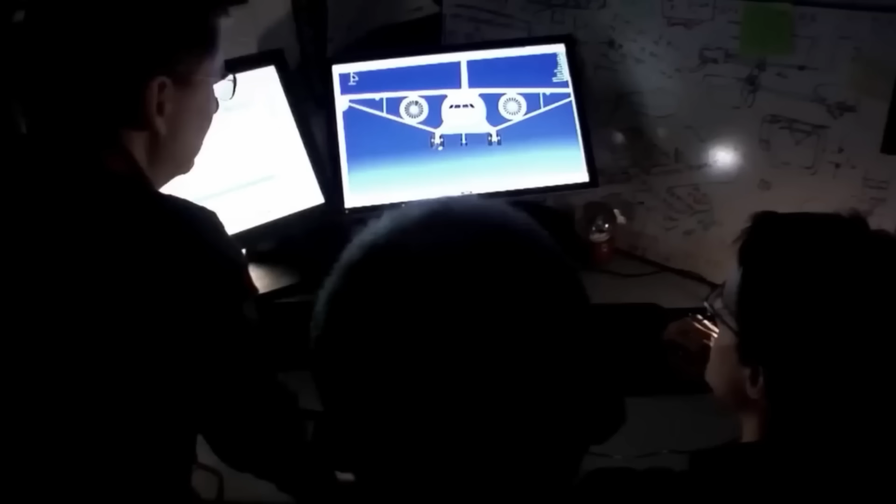For years, Boeing has studied an aircraft that refuses to fit into any existing category. It's too large to behave like a narrow body, yet too efficient to resemble a traditional wide body. Informally called the Boeing 797, it remains unlaunched but far from forgotten.

For decades, airline networks were built around the simple assumption that demand and aircraft would grow together. But that logic has begun to fracture. Many long-haul routes no longer justify the capacity of wide bodies, while narrow bodies stretched to their limits are increasingly being asked to fly missions they were never originally designed for.

The retirement of the Boeing 757 widened this gap and removed an aircraft that was capable of carrying passengers across oceans without the weight of larger jets.

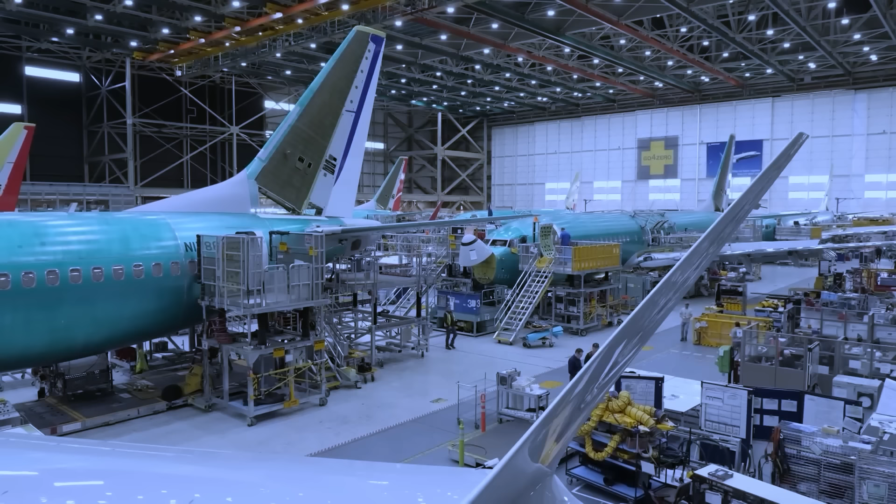At the same time, airlines have shifted toward point-to-point connectivity rather than relying solely on massive hub flow. This has created demand for aircraft that can profitably link secondary cities across continents. Manufacturers have responded by extending narrow-body range, yet these aircraft still face payload constraints and passenger comfort trade-offs on longer sectors compared to wide bodies.

What the industry lacks is an airplane engineered specifically for this middle space, not adapted into it. And that unresolved space is precisely where the 797 begins to make sense.

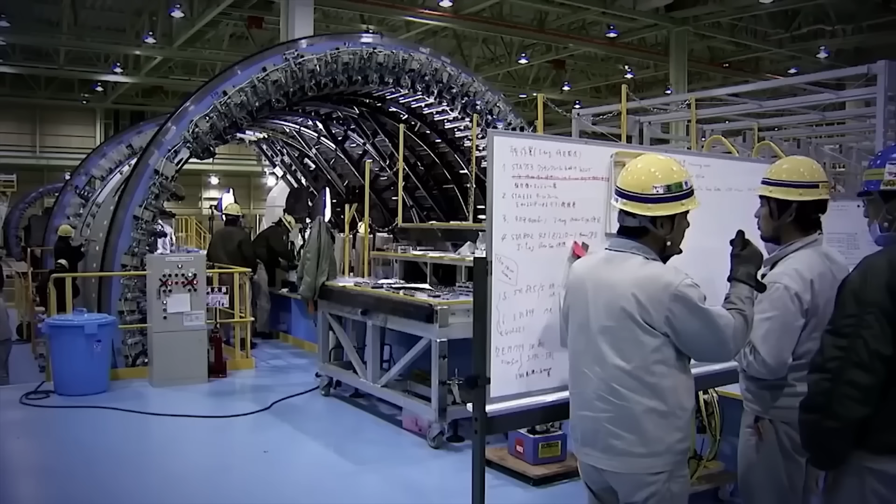In 2015, Boeing was ready to launch a new design. By 2017, multiple airlines had expressed interest. Boeing expected this new midsize airplane to generate 30% more revenue than narrow bodies and have 40% lower trip costs than wide bodies it'd replace.

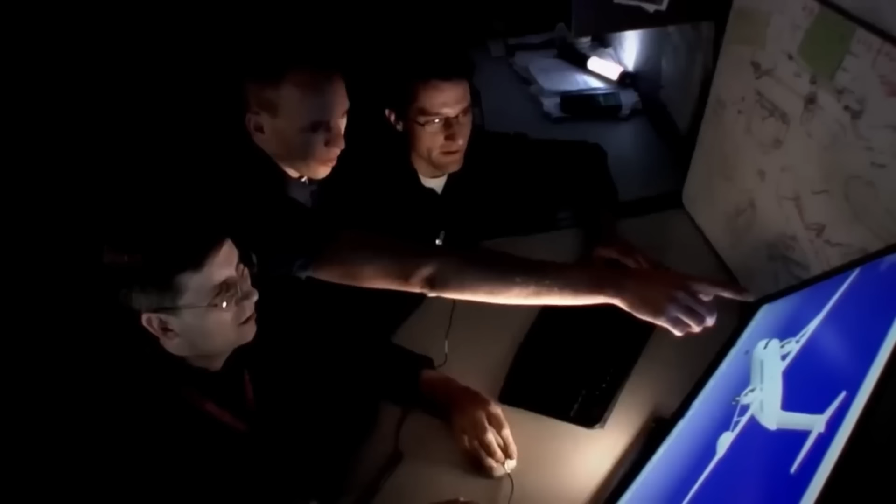In 2020, the plan was paused, then revived in 2021. By 2022, Boeing announced the program would be delayed again until new engines and development tools were ready.

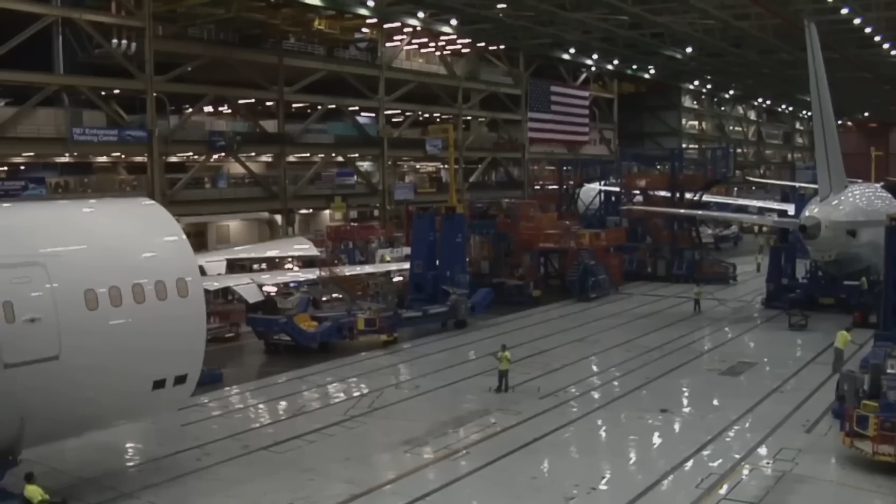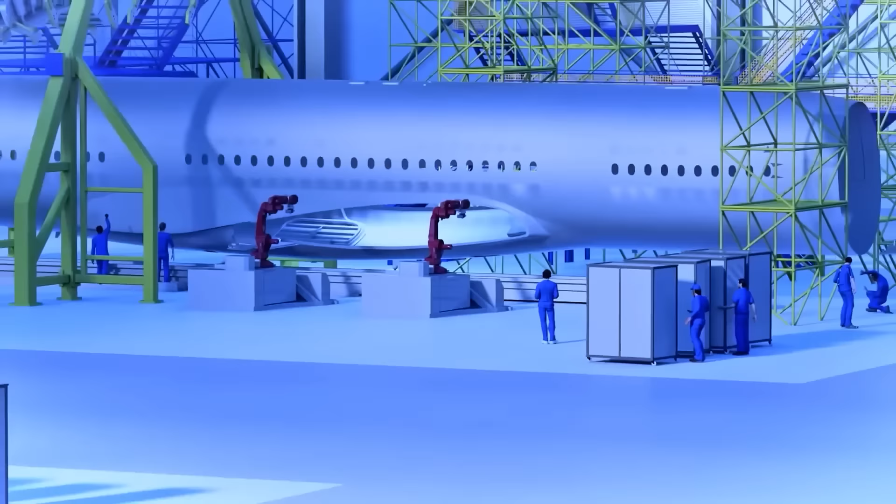However, if the program moves forward, the Boeing 797 would almost certainly be designed mostly inside a digital engineering environment long before any physical structure is produced. This reflects a broader industry shift toward model-based development, in which an aircraft is validated virtually before manufacturing risk is introduced. Engineers can now simulate structural loads, fatigue behavior, thermal expansion, aerodynamic forces, and even maintenance accessibility with a level of precision that wasn't possible in earlier generations of aircraft design.

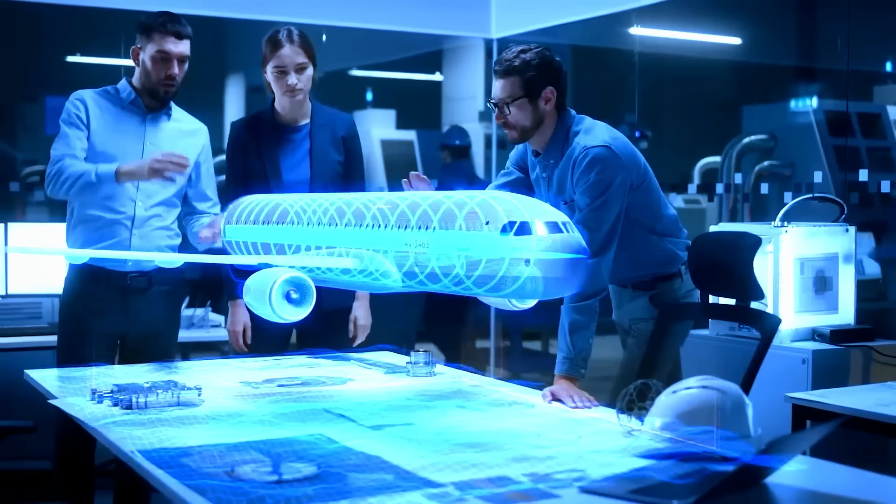The motivation behind this approach is as economic as it is technical. Errors identified during digital modeling can often be corrected with minimal disruption, whereas problems discovered after tooling is built have historically cascaded into delays measured not in months, but in years.

Commercial aircraft have relied on circular fuselages for decades because the geometry distributes pressurization forces evenly. This minimizes stress concentrations and simplifies structural reinforcement.

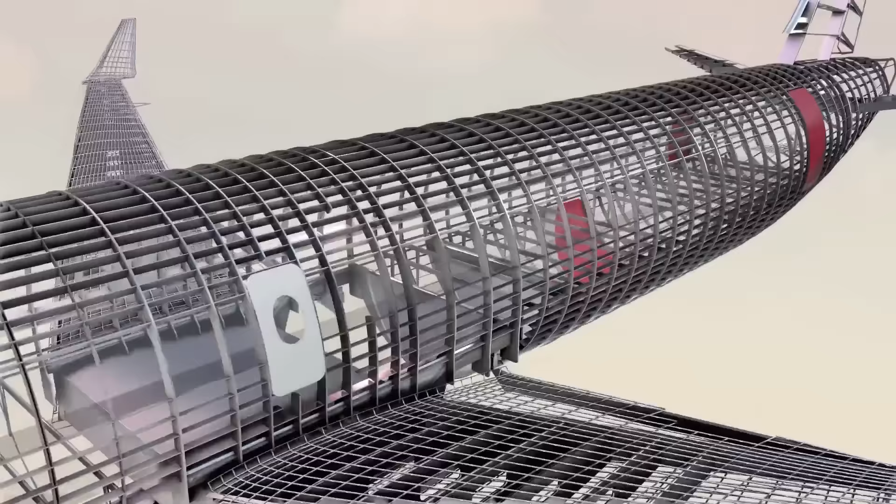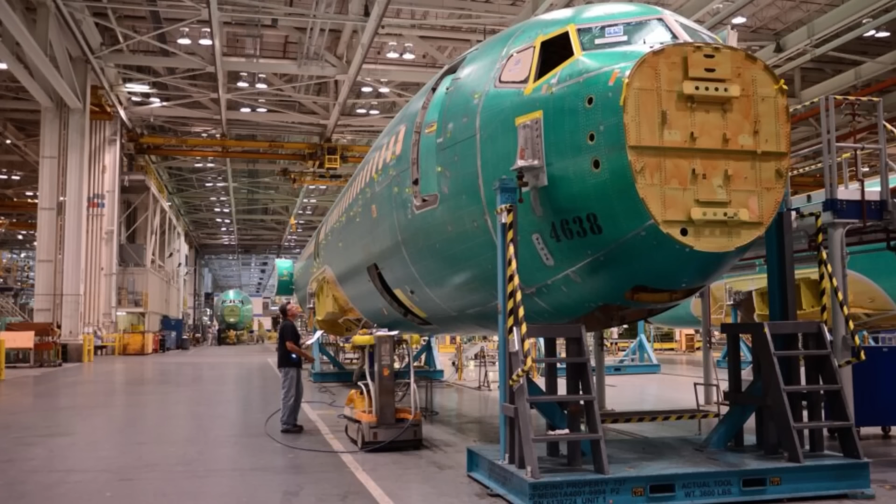However, Boeing has publicly discussed studying a twin-aisle fuselage with a slightly elliptical cross-section for the new midsize airplane. This is intended to provide wide-body style boarding efficiency while avoiding the structural weight penalties typically associated with larger cabin diameters. Once a pressure vessel deviates from a circular shape, load paths become more complex, and localized stresses must be carefully managed through material orientation.

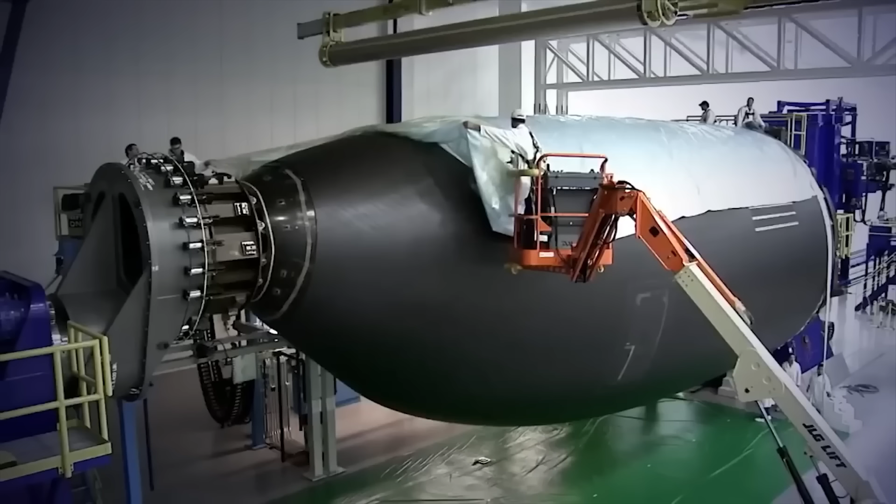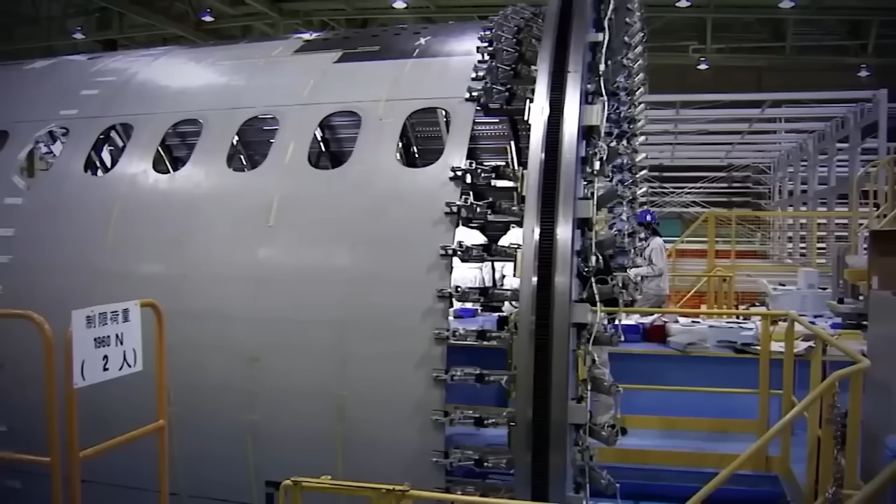This is precisely where a carbon composite fuselage offers advantages that traditional aluminum cannot easily replicate, since carbon fibers can be aligned along anticipated stress directions. This allows engineers to tailor stiffness and strength exactly where they are required.

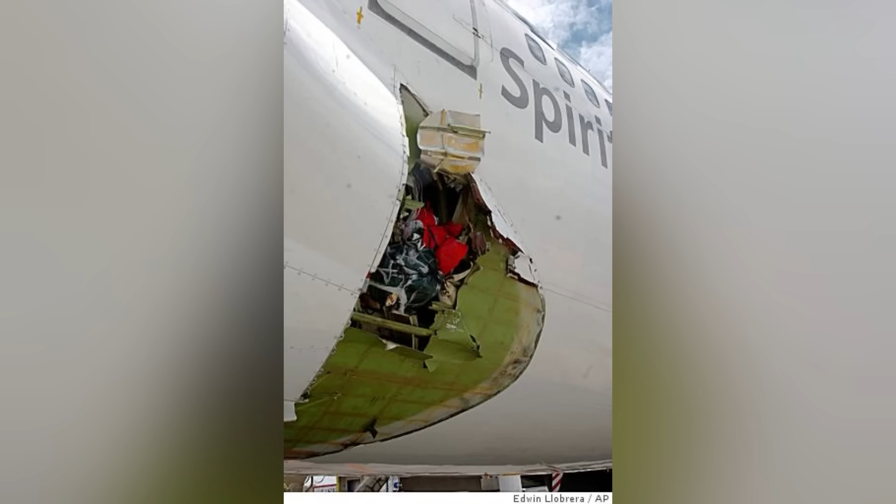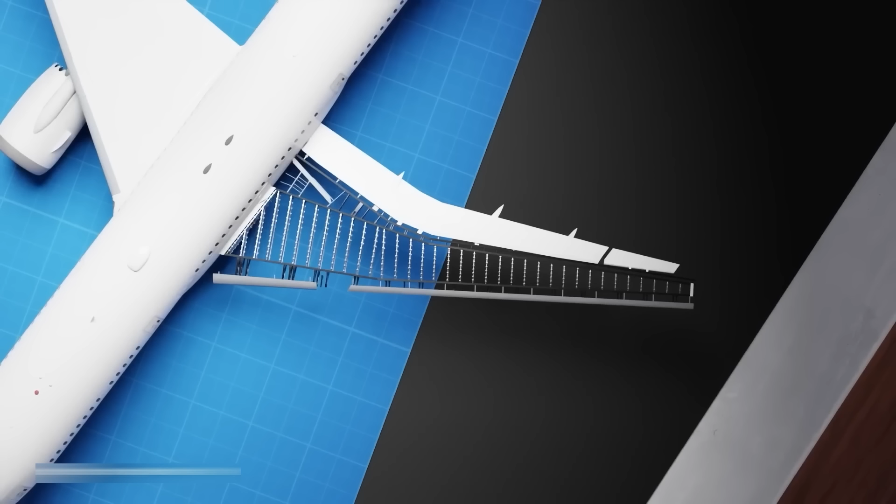Large composite sections also reduce the number of mechanical fasteners compared to metal construction, to reduce fatigue exposure and long-term inspection demands. Yet composites rely heavily on advanced inspection techniques because certain forms of impact damage are not always visible on the surface. But it's the wing that ultimately determines whether the airplane achieves the efficiency required to justify its existence.

Any aircraft attempting to occupy the space between narrow-body and wide-body categories must be designed to deliver aerodynamic efficiency while remaining compatible with airport infrastructure designed around smaller aircraft.

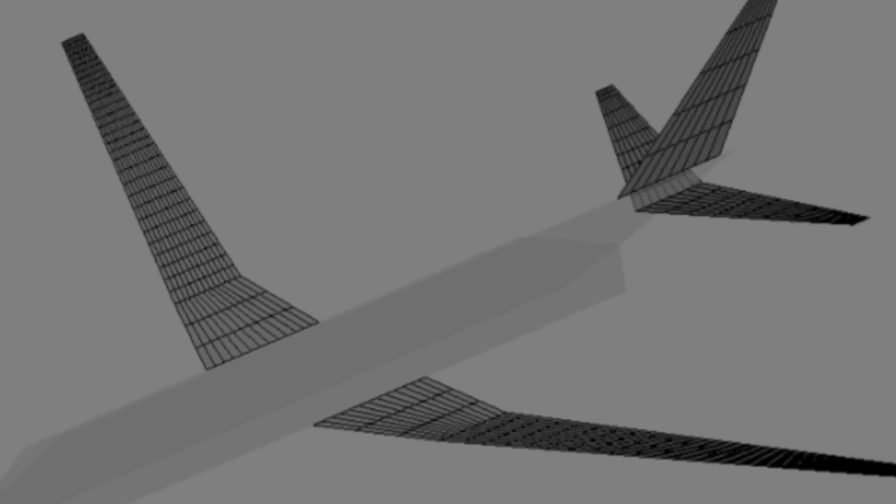Industry analysis widely anticipates a high aspect ratio composite wing. This reflects aerodynamic principles already demonstrated on newer generation aircraft, such as the 787, where longer spans reduce induced drag and improve fuel efficiency. Yet span cannot grow indefinitely because gate compatibility imposes hard operational limits.

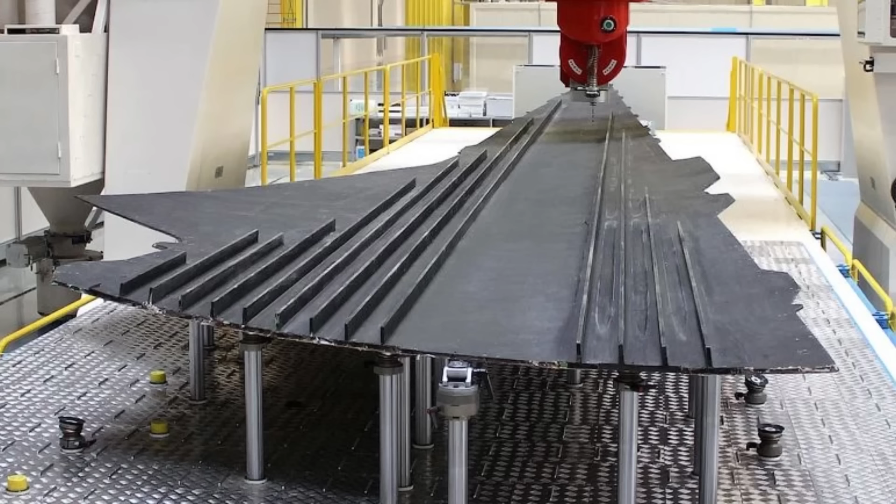This is why folding wingtip concepts have appeared in multiple industry discussions. Composite wings are intentionally designed to flex under load, sometimes by several meters during flight. This way, aerodynamic forces distribute more evenly and reduce stress concentrations at the wing root.

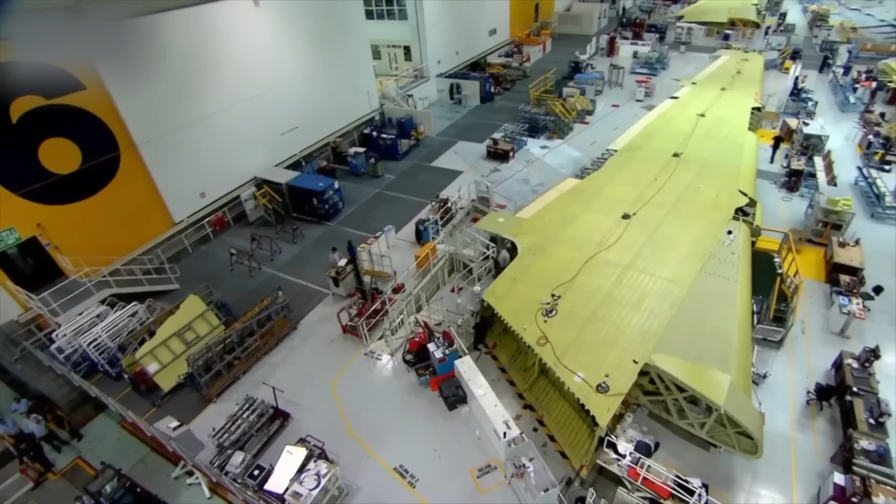At the center of this structure sits the wing box, which is the primary load-bearing element responsible for carrying bending forces that reach extraordinary magnitudes during turbulence. Fuel would be stored directly inside the sealed structure, meaning manufacturing precision is not merely desirable but essential.

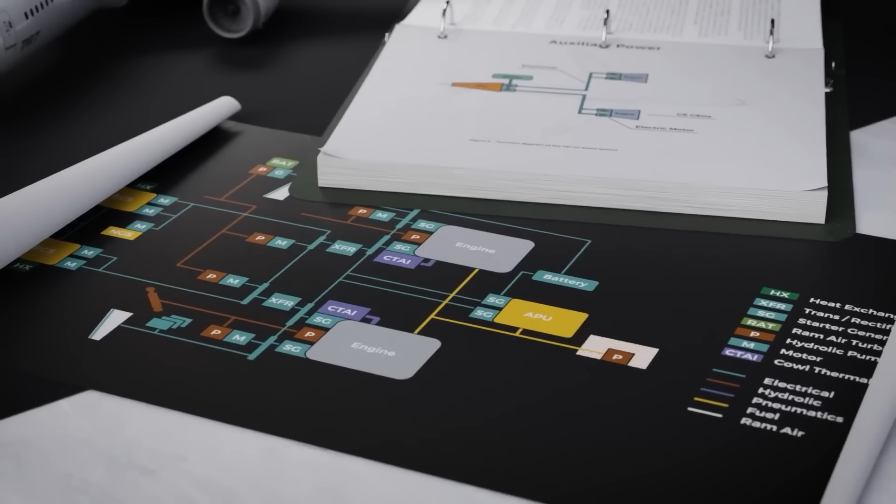Although no official program has begun and Boeing has not selected an engine, manufacturers have spent years studying the thrust class required to make such an aircraft viable. Most industry estimates place the requirement somewhere between 45,000 and 55,000 pounds of thrust. It is envisioned to use next-generation high-bypass engines, likely smaller than 787 engines, to achieve better fuel efficiency than current jets. Boeing has explored options with GE Aerospace, Pratt & Whitney, and Rolls-Royce.

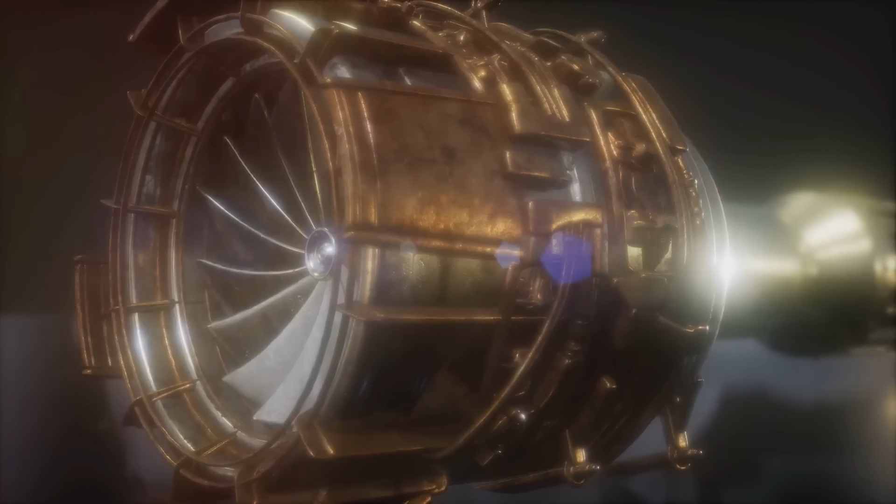The engine is expected to power a middle-of-the-market aircraft, focusing on routes between 4,000 and 5,000 nautical miles. The 797 could even incorporate advanced and highly efficient, or even hybrid electric, propulsion systems if developed in the 2030s.

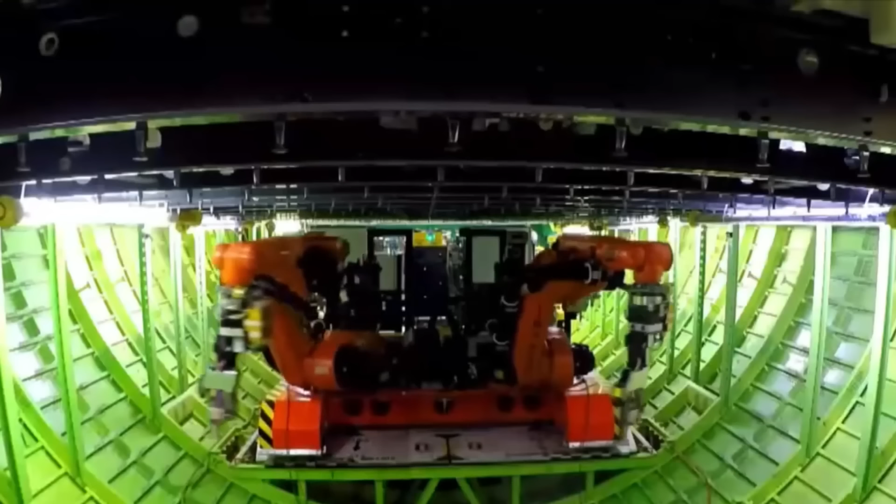The production strategy for any future Boeing clean-sheet aircraft may reflect lessons learned from the 787. The globally distributed supply chain there introduced coordination challenges that took years to stabilize. Industry reporting indicates a stronger preference toward tighter supplier oversight and a more integrated manufacturing architecture, even if major structural components continue to be built across multiple regions.

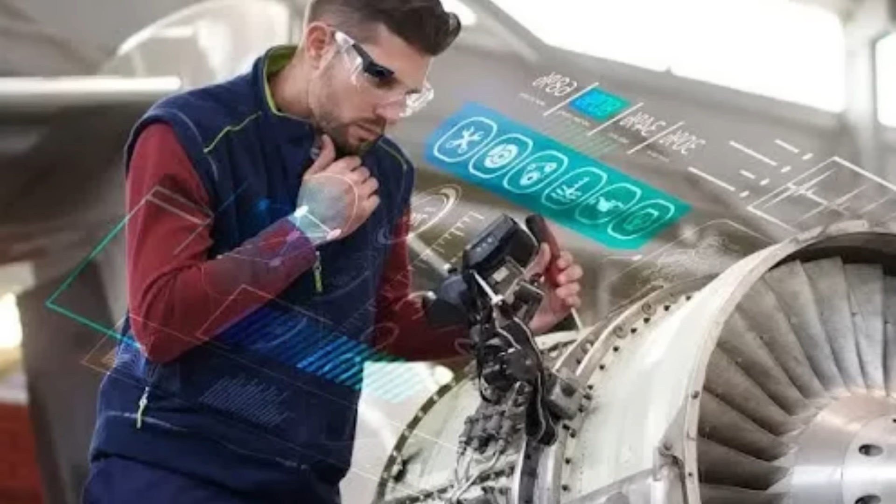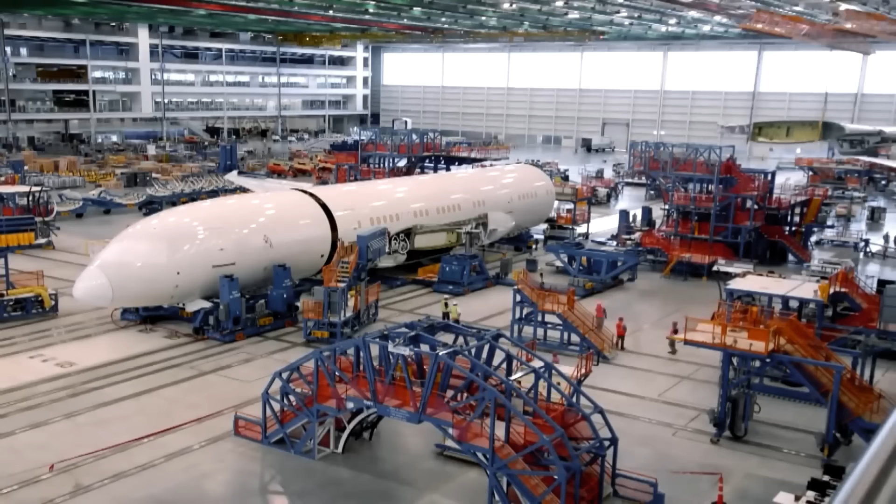Automation is expected to play an expanded role, with robotic drilling improving precision and digital measurement systems verifying tolerances in real time. Augmented reality guidance tools are already being evaluated to assist technicians during complex installations. They could project instructions directly onto the structure rather than relying solely on traditional documentation. The objective now is production predictability, because airlines are purchasing delivery certainty as much as they are purchasing aircraft capability.

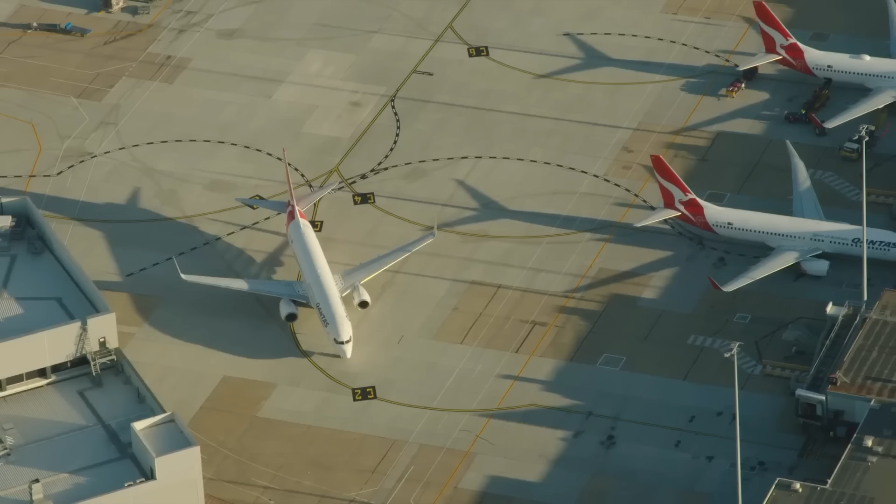However, building the airplane is only part of the challenge. Designing it to survive decades of cyclic stress may be even more critical. Every commercial aircraft operates within cycles of pressurization and depressurization, slightly flexing the fuselage during climb and relaxing again during descent thousands of times across its service life.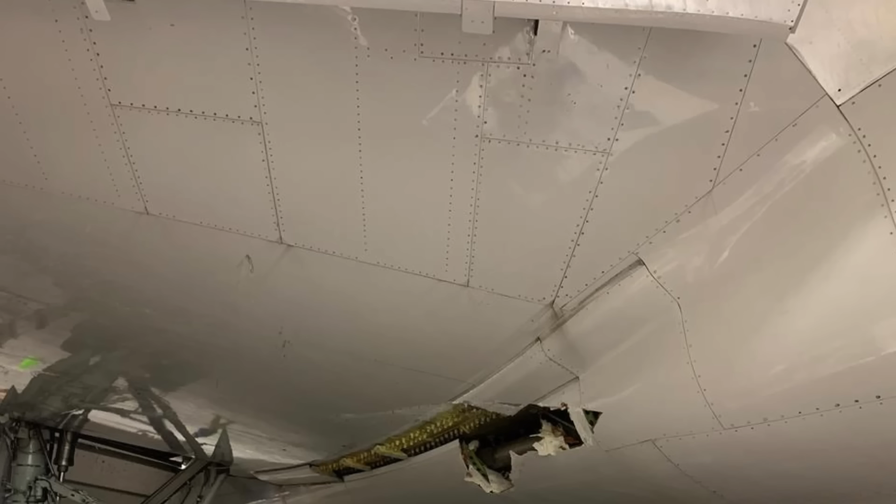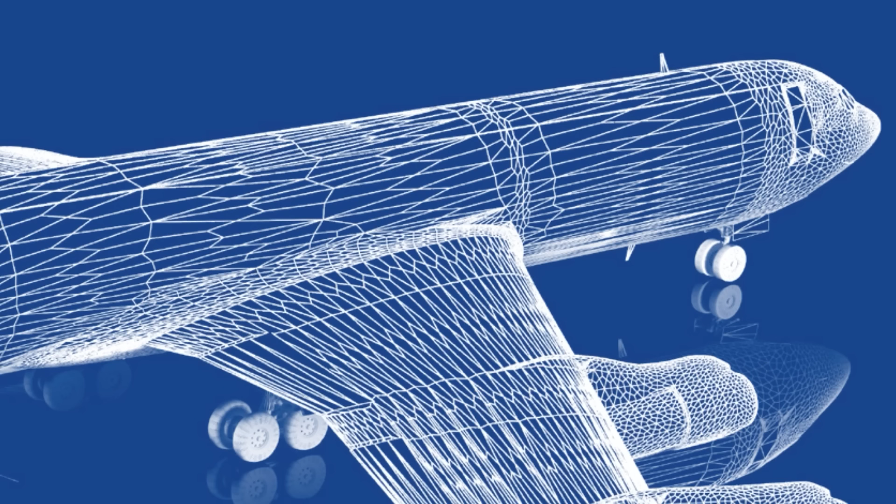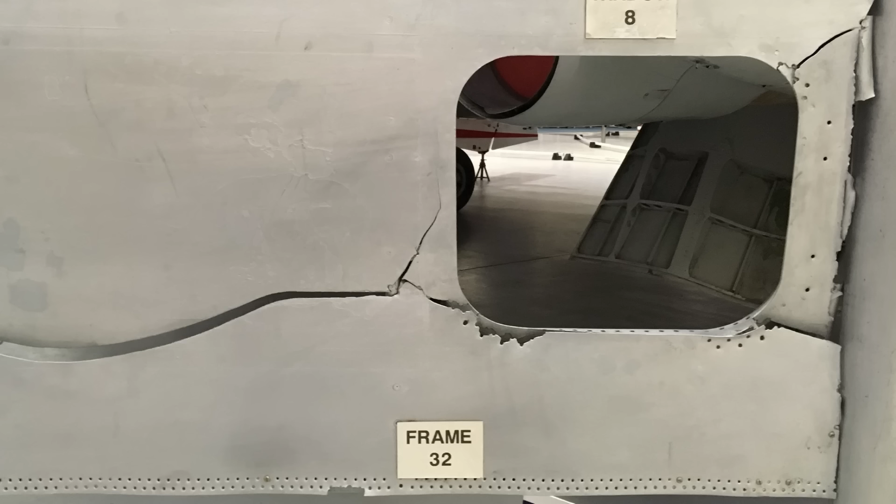Metal airframes eventually accumulate fatigue under these conditions, but composite structures behave differently. They resist crack propagation but require more sophisticated inspection techniques. Newer aerospace designs incorporate structural health monitoring systems like fiber optic sensors, capable of detecting strain variations in real time. This helps teams identify emerging stress concentrations long before they manifest as visible damage.

Aircraft are no longer evaluated during only scheduled inspections. They are progressively becoming machines that report their own structural condition.

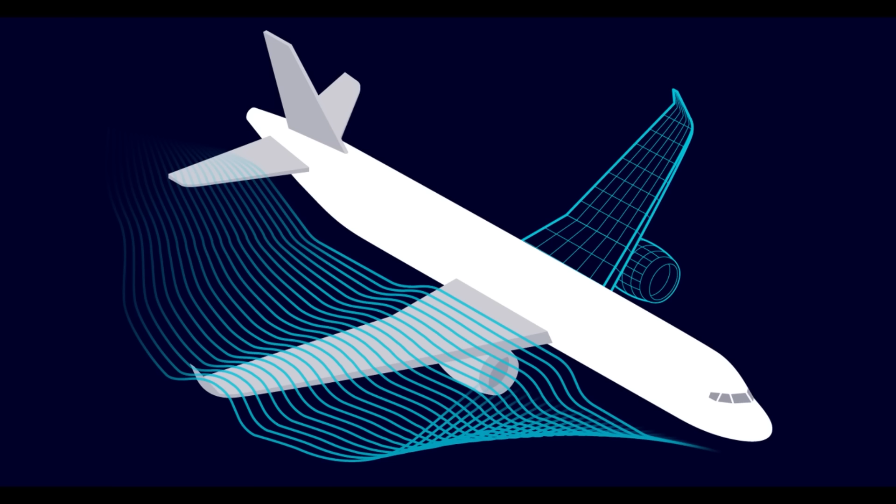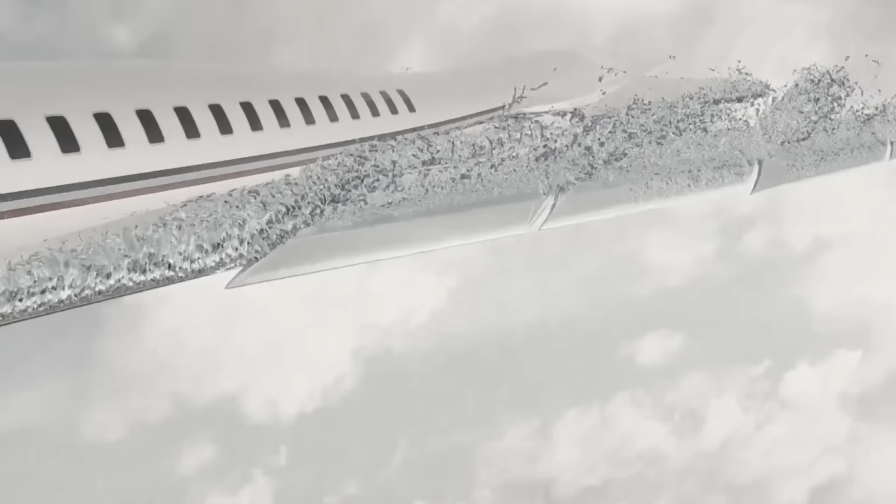At the same time, aerodynamics determines whether the aircraft fulfills its economic mission. While wind tunnel validation remains indispensable, computational fluid dynamics now performs much of the early aerodynamic refinement. This enables engineers to simulate airflow across millions of data points and adjust surfaces with remarkable precision. Minor contour modifications can translate into measurable fuel savings when compounded across decades of operation.

Research into laminar flow continues throughout the industry, although maintaining it consistently in airline service remains technically challenging due to surface contamination. Even engine nacelles and nose shaping are refined through these simulations to minimize drag. Passengers will likely never notice these aerodynamic subtleties, but airlines absolutely will, because efficiency scales with every flight hour.

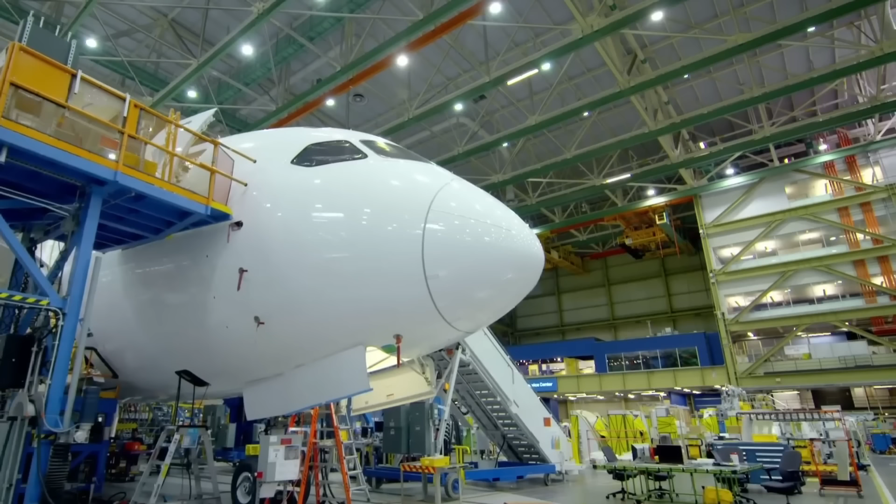Regulatory scrutiny has intensified across the aerospace sector and ensures that any new aircraft must demonstrate compliance across thousands of safety criteria under worst-case conditions, including engine failure during takeoff, rejected departures at maximum weight, crosswind controllability, and emergency evacuation timing. Nothing is assumed, and everything is demonstrated.

Certification alone can consume close to a decade when development and testing are combined. This explains Boeing's repeated emphasis that its next aircraft must be launched only when technological readiness, along with supply chain stability and regulatory pathways, align.

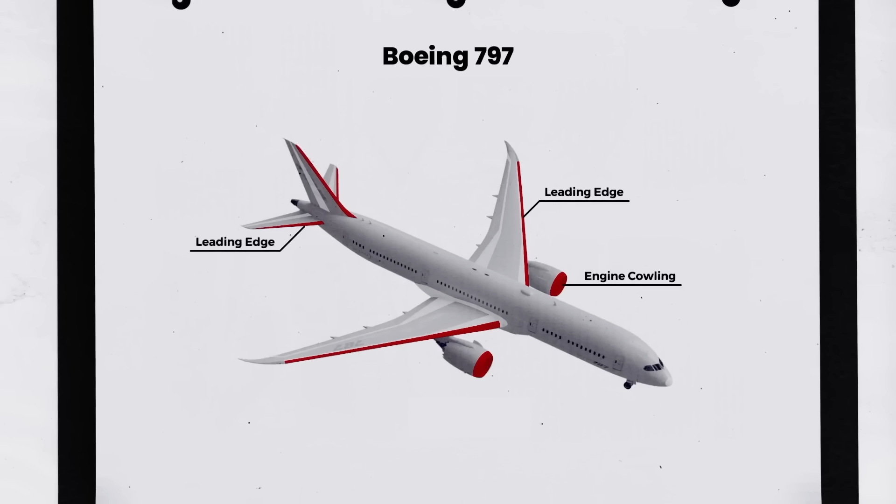Until that moment arrives, the 797 remains what it has long been: a serious engineering study, refined but not yet approved. And history suggests that some of aviation's most influential aircraft begin exactly this way.

About that question from earlier.

Specialized aircraft offer optimized efficiency and payload capability on routes that are beyond the practical limits of single-aisle jets. However, increasingly capable narrowbodies provide lower operating risk, greater scheduling flexibility, and easier airport compatibility, which makes them attractive for airlines prioritizing frequency and cost control over maximum capacity.

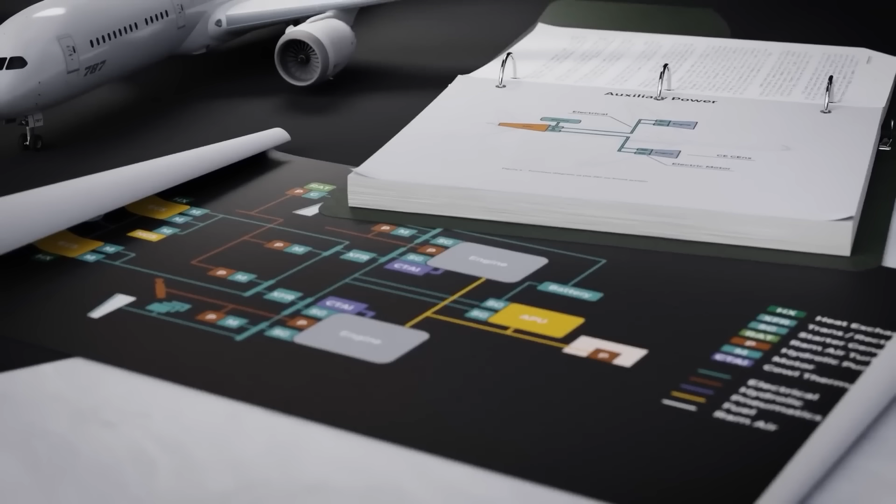The NMA is not a promise yet, but the technologies expected to shape it are already influencing how future aircraft will be engineered, manufactured, and certified. If launched, it would likely mark one of Boeing's most consequential design decisions in decades.

For years, the largest version of Boeing's next widebody family felt like a ghost aircraft. Talked about quietly, studied internally, then shelved while more urgent problems took over. But suddenly, a single announcement at the Dubai Air Show changed the tone of the conversation.

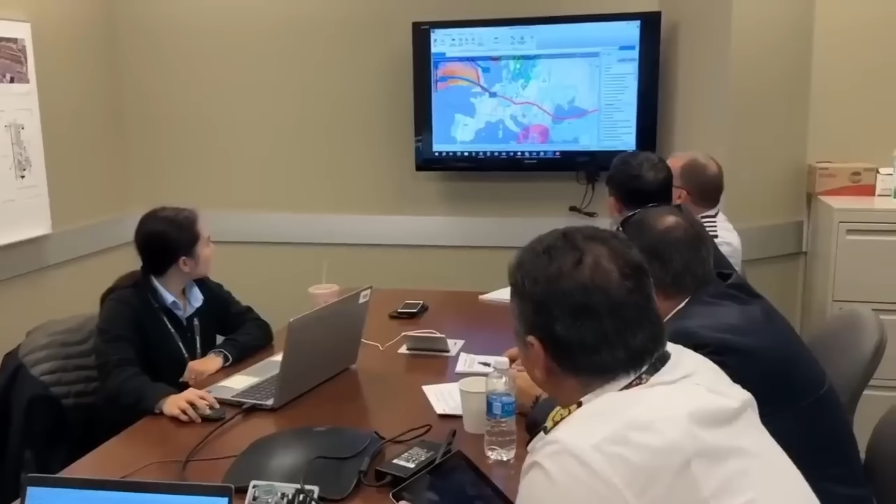The 777-10 is not a clean sheet aircraft. It's a stretch of the already enormous 777-9, which is the largest member of the 777X family. Boeing has studied this idea since the early 2010s, when engineers confirmed that stretching the airframe was technically feasible. The problem was never whether it could be done. The problem was whether it should be done.

For most of the last decade, Boeing focused on certifying the 777-8, the 777-9, as well as the freighter variant, all of which remain delayed. With those programs consuming resources and attention, the stretch quietly went dormant.

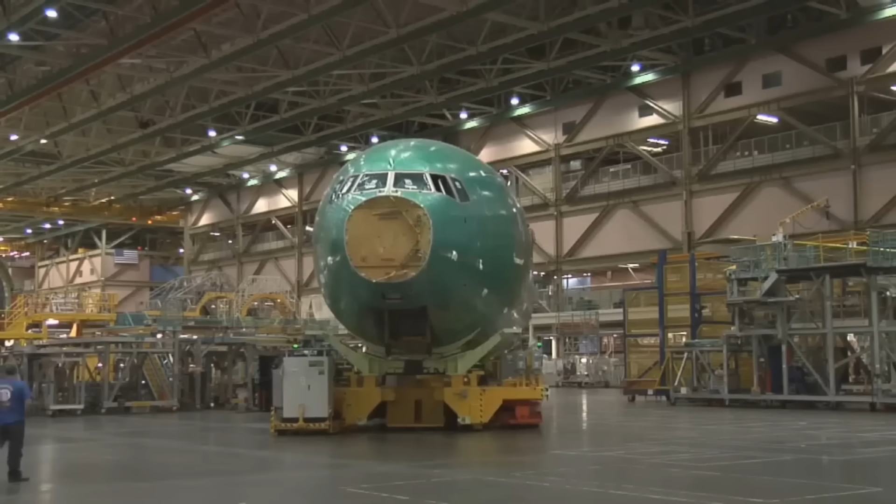That changed when the airline Emirates publicly backed a feasibility study. Their order for additional 777-9s came with something far more important than money. It came with intent. Emirates made it clear they are willing to anchor the program if Boeing decides to move forward. And that statement is a major reason as to why the 777-10 is being discussed seriously again.

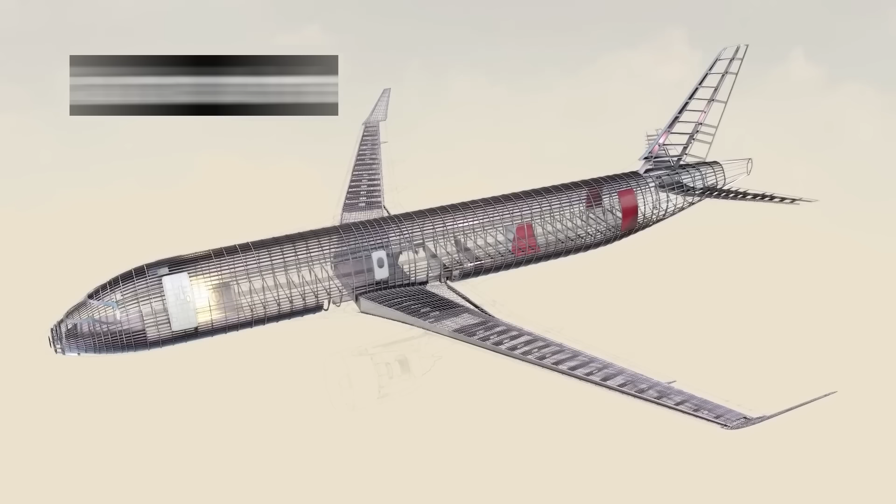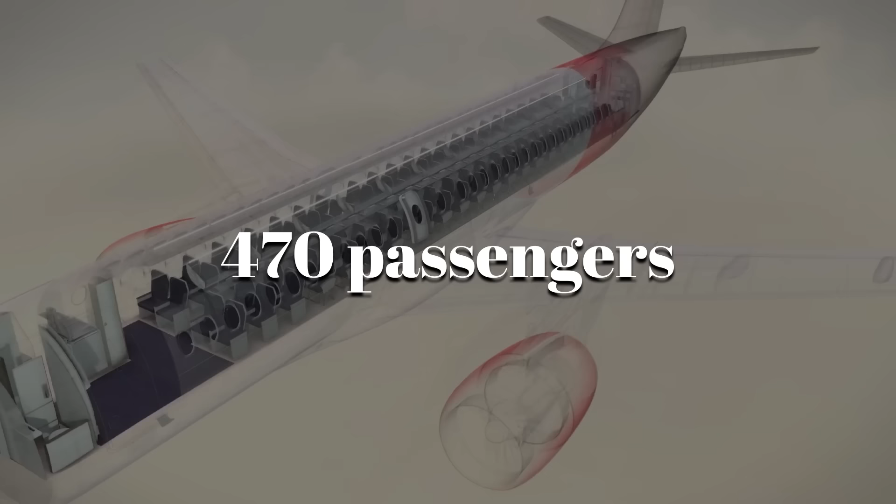The proposed stretch is substantial. Boeing studies suggest an increase of roughly 16 feet over the 777-9, which would push the total length close to 268 feet. That would make it longer than a football field and also the longest passenger aircraft ever proposed. Cabin capacity estimates hover around 470 passengers in typical high-density layouts, but there's still room to go higher depending on configuration.

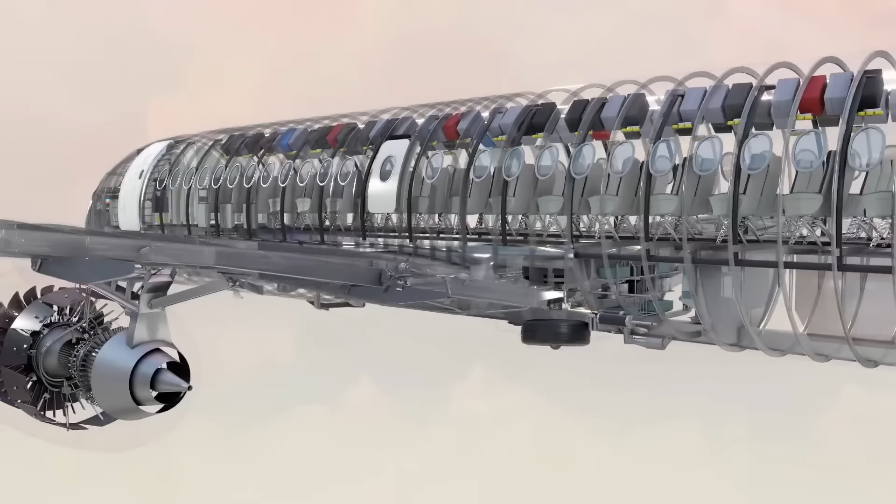This matters because the aircraft would sit in a unique space. It would approach the capacity once dominated by the Airbus A380, but with 2 engines instead of 4. That alone drives almost every design decision Boeing would need to make, such as takeoff performance or structural reinforcement and certification margins. This creates a question. Does the data and gap from the A380 actually support building an aircraft this large in today's market, or is this a case of an ambitious airline pushing risky development instead of economics?

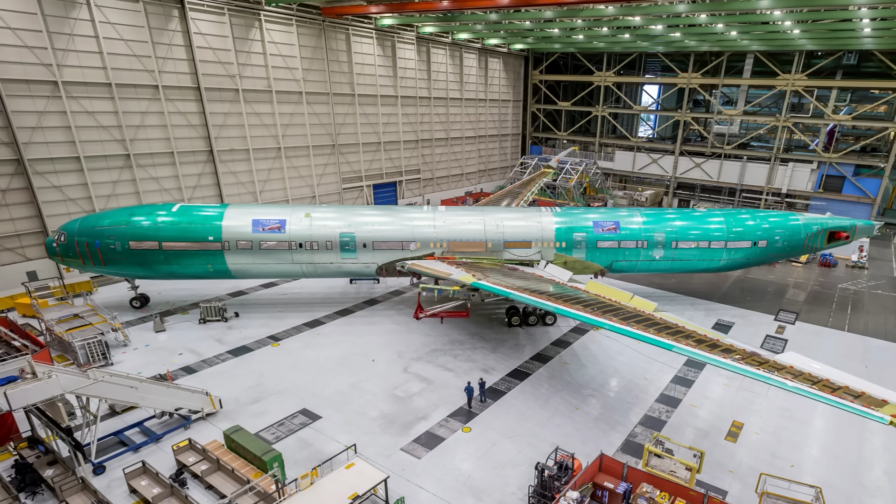At first glance, stretching a jet looks like a fuselage problem. Add plugs, reinforce frames, extend systems. But for the 777-10, the real starting point is the wing.

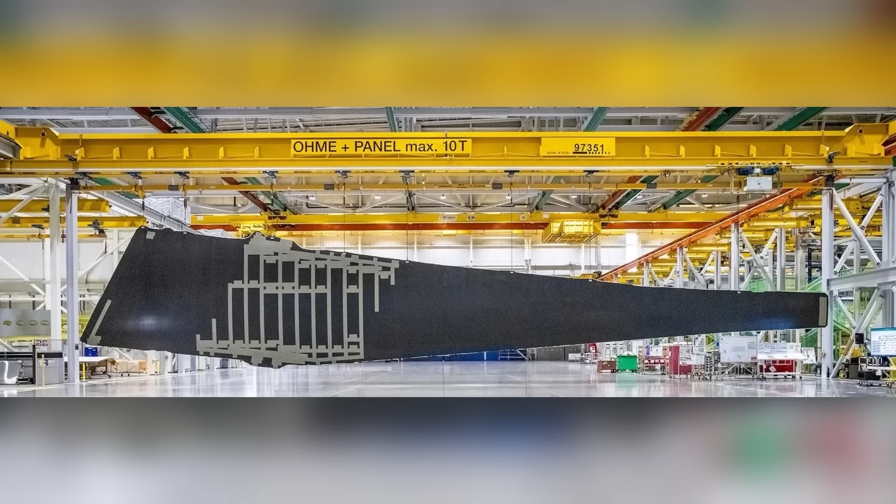The composite wing developed for the 777X was already designed with growth in mind. Its folding wingtips allow a massive span on the ground without exceeding airport gate limits. That same wing provides the lift margin Boeing would rely on to carry a heavier and longer airframe. It already carries higher bending loads than previous 777s, with its longer span and higher aspect ratio.

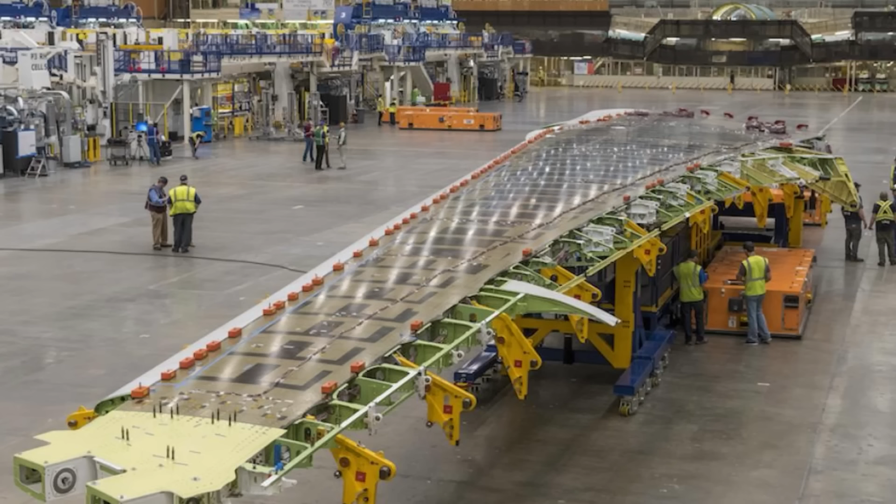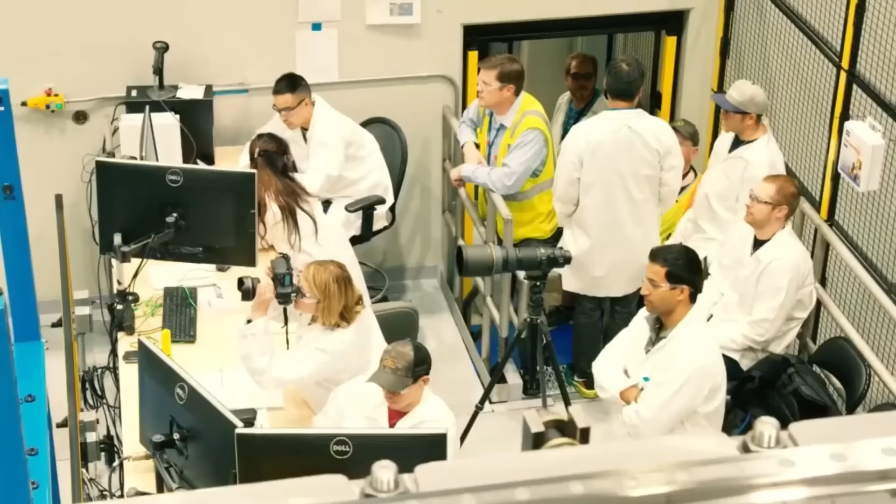Boeing's study focuses on whether that margin is sufficient for the added fuselage length, or if localized reinforcement at the wing root and center wing box would be required. However, any reinforcement would increase structural weight, which then feeds back into fuel burn, range, and ultimately also takeoff performance. Essentially, Boeing is testing how far the existing wing can be pushed before those trade-offs outweigh the capacity gains.

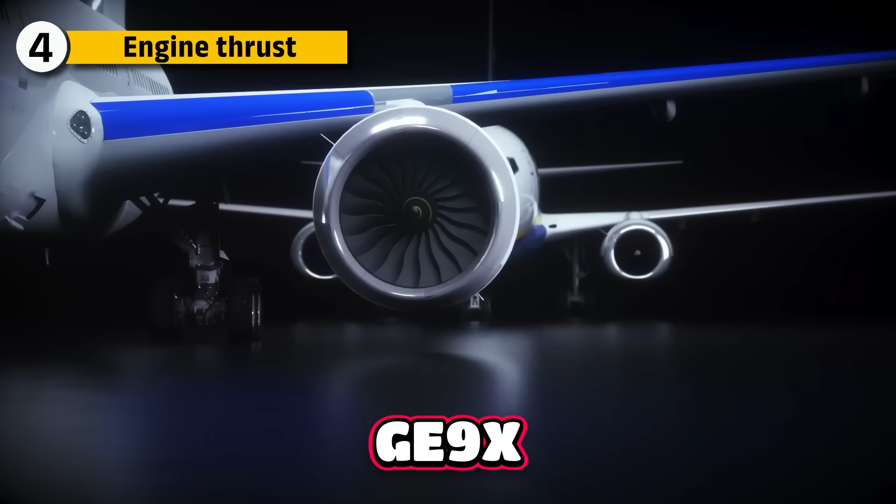The 777-10 would almost certainly use a derivative of the GE9X, already developed for the 777-9. But the 10 would push further and leverage the GE9X's efficiency and record-setting thrust of around 110,000 pounds for greater passenger numbers. So far, the aircraft remains under a Boeing feasibility study, driven by interest from airlines such as Emirates.

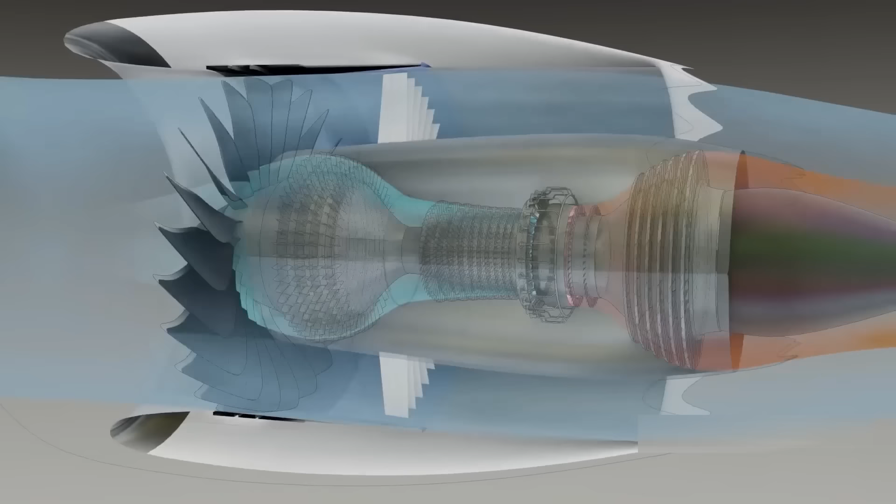But its thrust is not the limiting factor since the GE9X produces more than enough power. The challenge actually lies in certification scenarios, and particularly engine-out performance during takeoff. Regulations require a twin-engine aircraft to safely continue takeoff after the failure of one engine at the most critical point. For an aircraft of this size, those margins become extremely tight.

Boeing has made it clear that this is one of the biggest technical hurdles. Can the aircraft maintain directional control? Can it climb at the required gradient? And can it do so within runway length limits at major airports? And all these questions are not theory. In fact, they play a major role in determining whether the aircraft is certifiable at all.

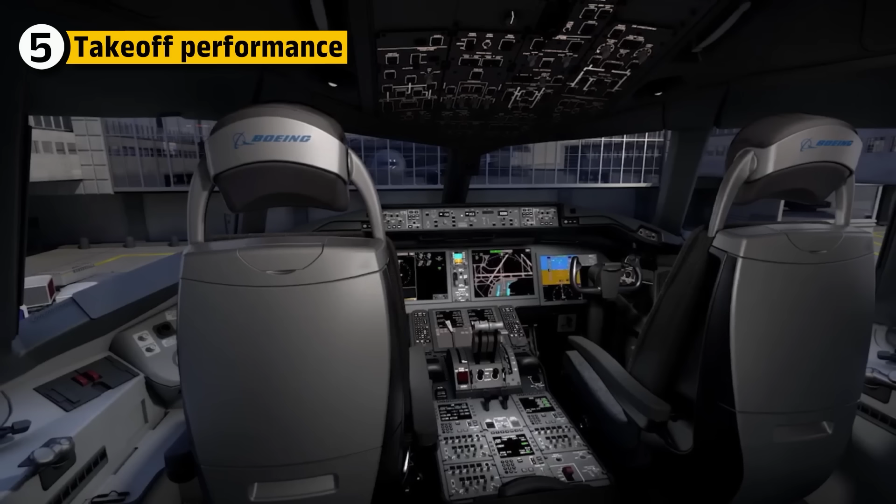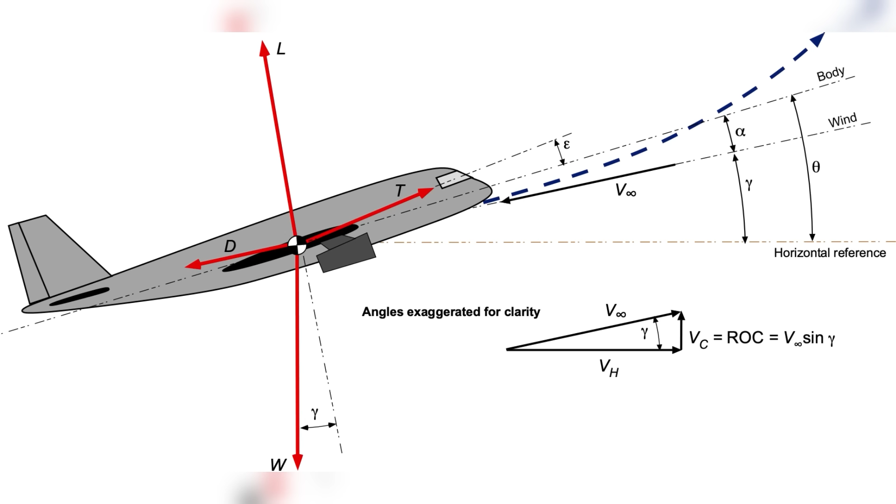The 777X's longer fuselage raises tail strike risk, so Boeing added software-based protection into the flight control system. During takeoff, the aircraft limits pitch rates to keep the tail safely clear of the runway. However, this is not viewed as the primary challenge for a potential 777-10 stretch. The dominant concern remains certification-level takeoff performance, especially engine-out climb requirements and runway limitations, which become increasingly restrictive as aircraft size and weight grow.

If the 777-10 requires longer runways, lower payloads, or reduced range at busy airports, its market shrinks instantly. Boeing's feasibility work focuses on modeling these scenarios across real-world airports, including cities like Dubai, London Heathrow, Los Angeles, and other slot-constrained hubs where aircraft of this size actually make sense.

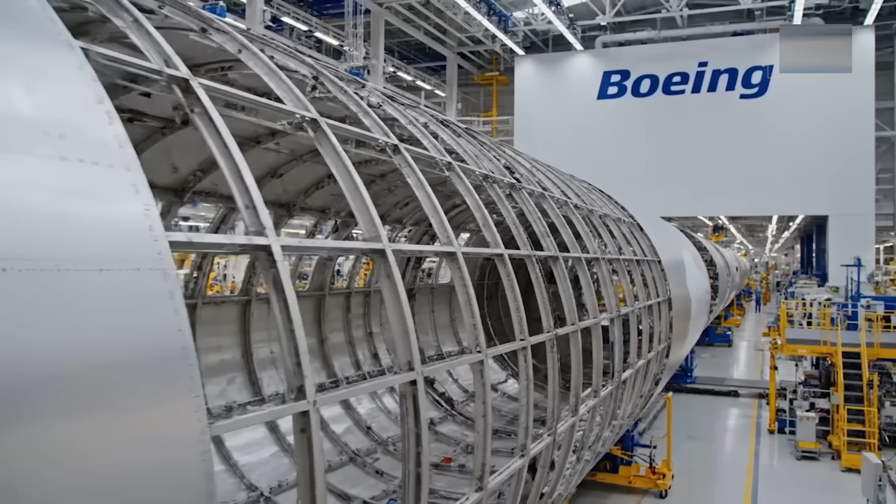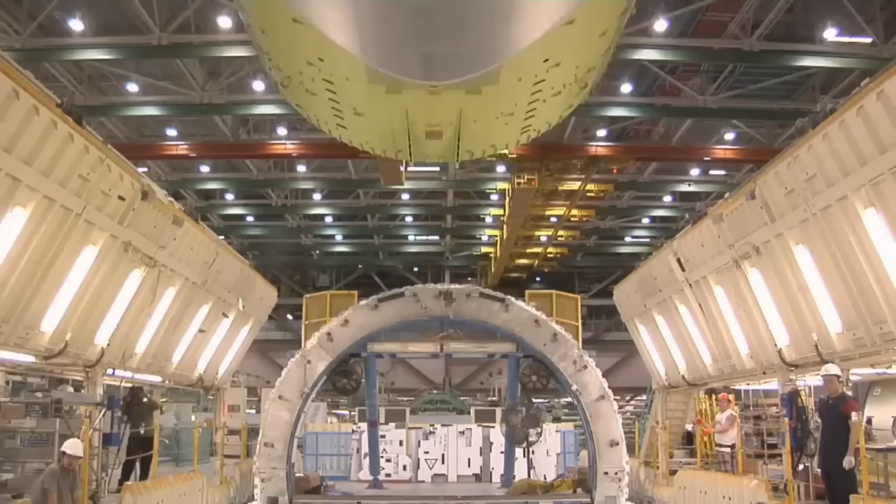Stretching an aircraft always adds structural weight. Frames get stronger, landing gear loads increase. Boeing knows this already, but what they're trying to estimate is by how much the weight will actually increase. Every added ton must be justified by revenue potential. If the aircraft carries more passengers but sacrifices too much range or cargo capacity, airlines lose flexibility. Boeing's internal modeling weighs seat count against payload range curves and looks for a balance that keeps the aircraft economically viable across multiple mission profiles.

Emirates is still pushing for the development of the 777-10. For them, the aircraft seems to be a strategic necessity more than a flagship. As the world's largest A380 operator, they built their entire network around high-capacity aircraft, feeding a global hub. What that means is Emirates cannot simply add more flights as demand grows. Their only scalable option is to move more passengers per departure.

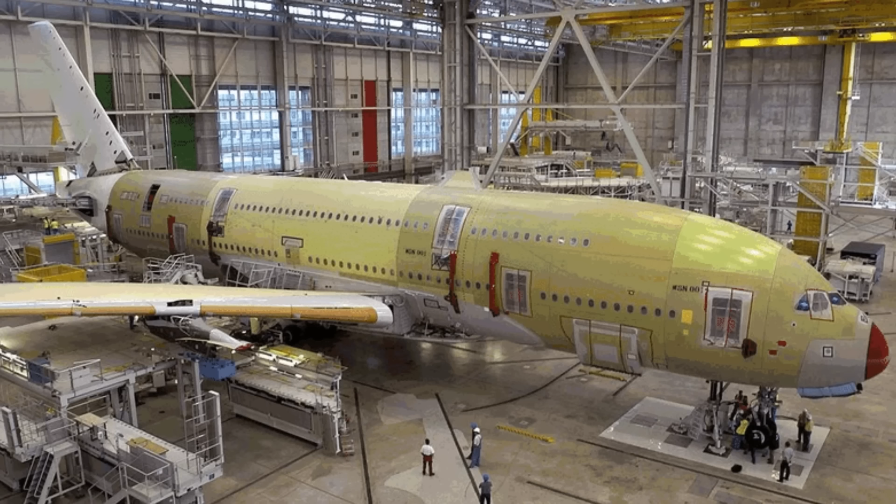But that model only works if similar capacity exists in the future. The A380 fleet will not last forever. Production has ended and any new variant will not be coming. As the A380 fleet ages and production remains closed, support costs will rise and capacity will inevitably decline. No current twin-engine aircraft fully replaces what the A380 provides. A stretch 777 comes closest and combines high capacity with lower operating costs. Without an aircraft like the 777-10, Emirates would eventually be forced to rethink its hub strategy and accept structural limits on future growth.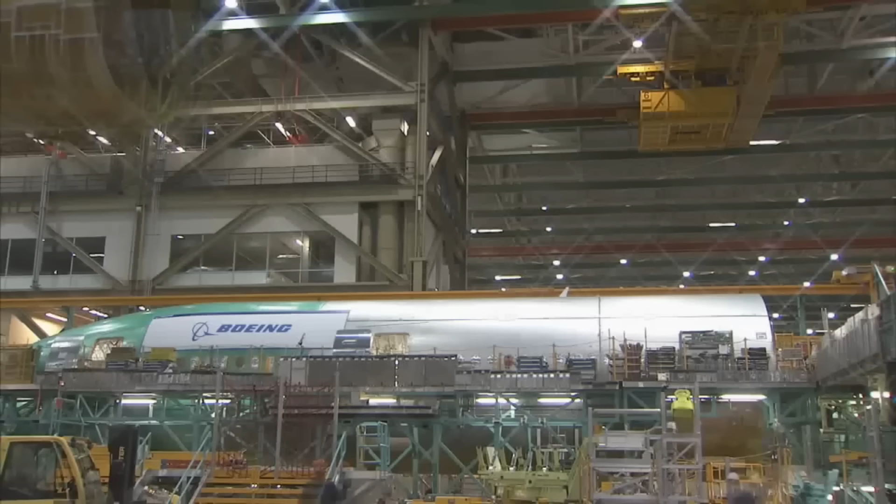Boeing's caution comes from simple math. The global replacement market for aircraft seating over 350 passengers is estimated at around 1,000 aircraft, keeping in mind various market industry analyses. That includes aging A380s and older 777-300ERs. This means it is not a high-volume market by any margin. Launching a new variant requires confidence that development costs can be recovered, and Boeing is not in a position to gamble lightly. They have to weigh every single decision against certification delays, as well as production constraints and ongoing recovery from past crises.

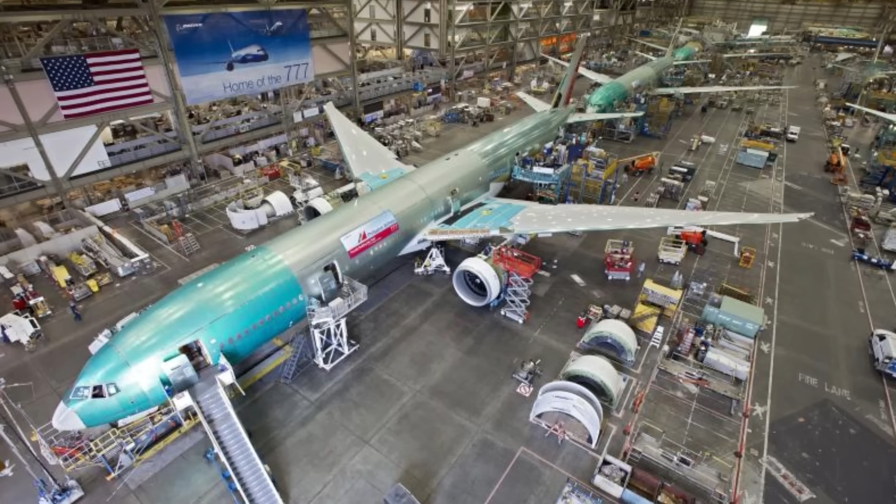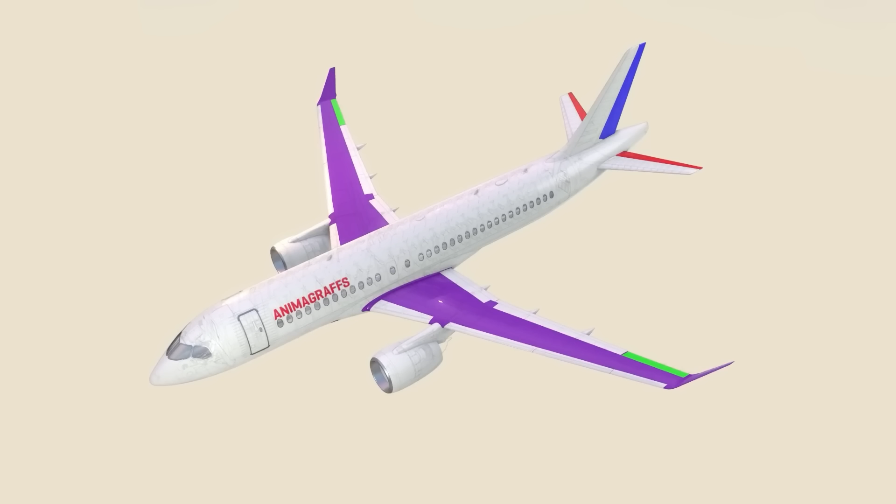The timing of this study also matters. Airbus emerged from the Dubai Air Show with major wins across widebody and narrow-body segments. Airlines that once relied almost exclusively on Boeing are diversifying. That shift adds pressure. At the same time, Boeing's 777X program remains uncertified and is now years behind schedule. The Federal Aviation Administration's oversight environment is stricter than ever. Any new derivative would face intense scrutiny from day one. Now the 777-10 cannot be rushed, and Boeing knows it.

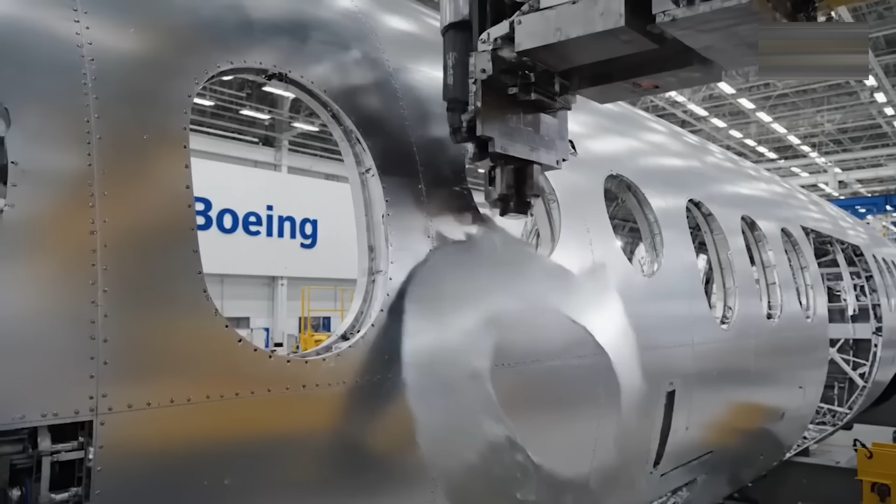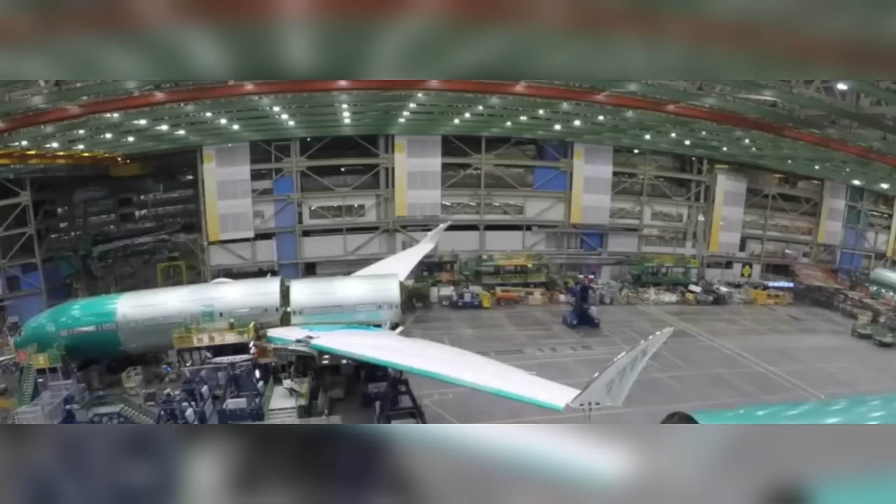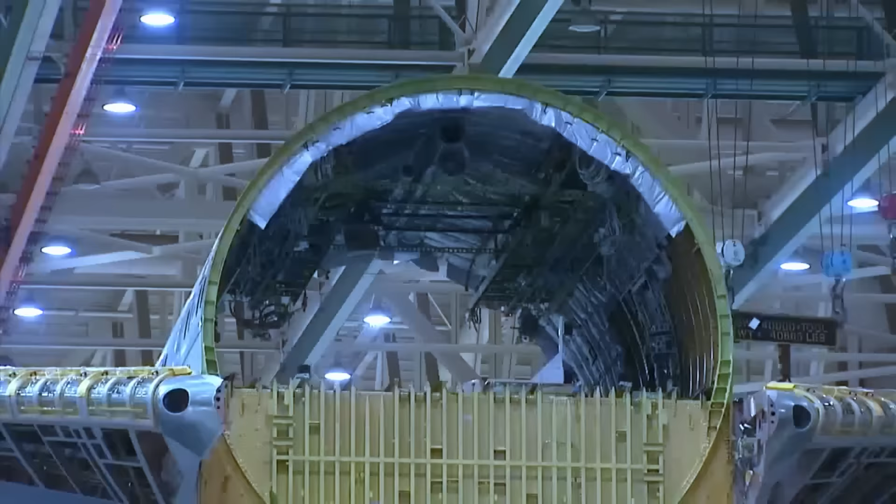If approved, the 777-10 would follow the same production architecture as the 777X. Major fuselage sections would be manufactured globally and assembled at Boeing's Everett facility. Composite wings would continue to be built in Washington State. Systems commonality with the 777-9 would be maximized to reduce complexity. What will change is scale. Longer fuselage sections require new tooling adjustments, and assembly flow would need recalibration. Even ground handling procedures would be updated, and factors like hangar compatibility also become a consideration at this size.

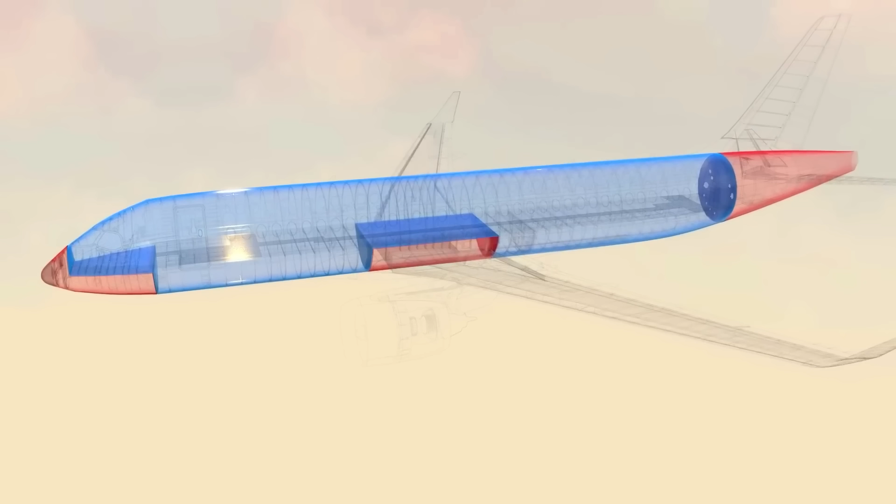Ultimately, the 777-10 lives or dies on certification margins. Boeing can solve engineering challenges, but the harder question is whether regulators are satisfied with safety margins under worst-case conditions. That includes rejected takeoffs as well as engine failures and abnormal configurations. And until those questions are answered through analysis and testing, the aircraft remains a study, not a launch, not a promise, just a possibility grounded in data.

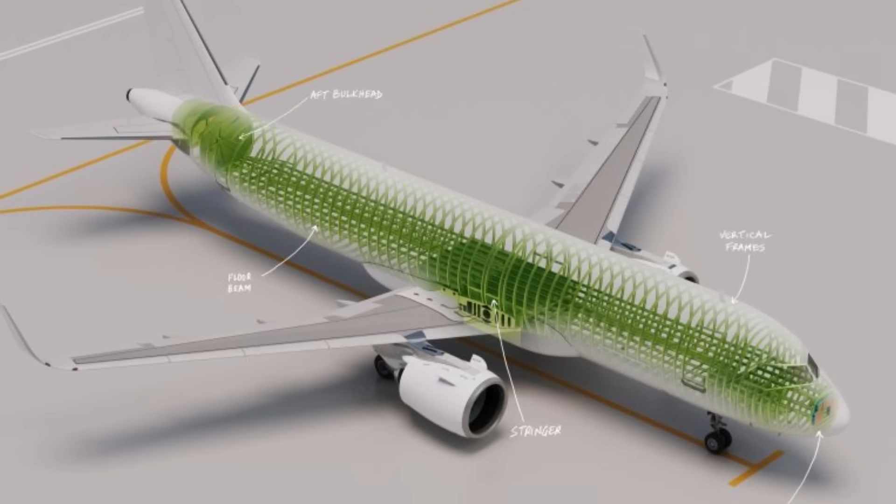And that question from earlier? Data supports development of this aircraft only in limited conditions. Factors like slot-constrained hubs and rising long-haul demand with Emirates' hub-focused model justify it. But the global market remains narrow, which means profitability would depend on a small group of high-density operators rather than widespread airline adoption. But the 777-10 is not about breaking records. It is about whether the industry still needs ultra-high-capacity aircraft in a twin-engine world. Boeing is studying that question carefully, and for the first time in years, the answer is no longer obvious.